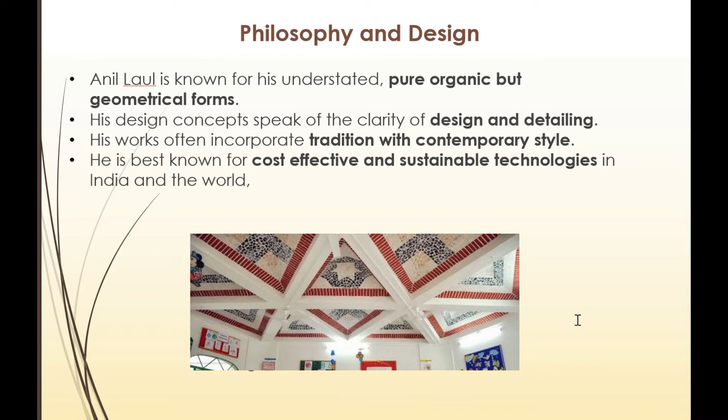Laul has been involved in various teaching, hands-on training programs. So he develops these techniques for low-cost construction, and then he used to take workshops to teach these techniques to other people. So in his words, I have chosen to do research and not research as we know it. To my mind, it is simple and requires a blend of nature's bounty, traditional wisdom, and advancement of the technologies developed by man. Nature, tradition, and technologies.

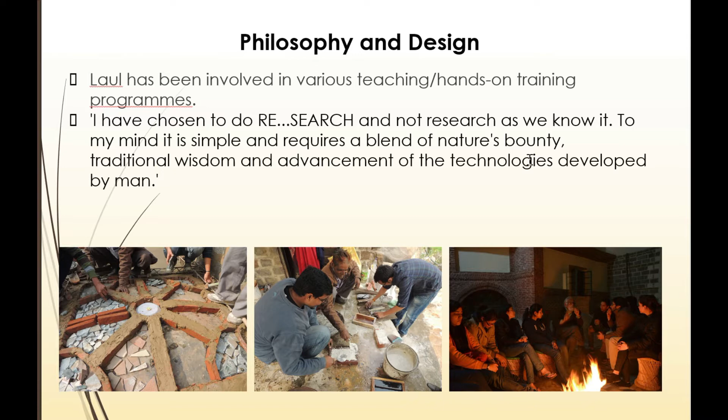Will I live in a home built with the technologies that I propagate for the underprivileged? Yes. In my case, I do. Book Green is Red by Anil Laul. So in this book, this statement by him is written because even though he developed low-cost techniques, the quality was very good. So even he was himself ready to live in such houses. The construction technologies used in high-income group housing are the same used in a slum rehabilitation scheme.

He built low-cost, low-energy, climatically suited and aesthetic houses. Even though it was low-cost, it was aesthetic as well, with recycled waste for people's real needs, keeping the humane scale alive. Not very grand, but humane scale. So this is a book by Anil Laul sir.

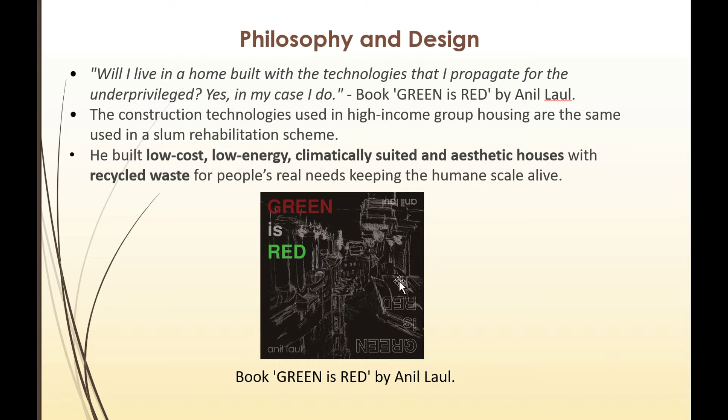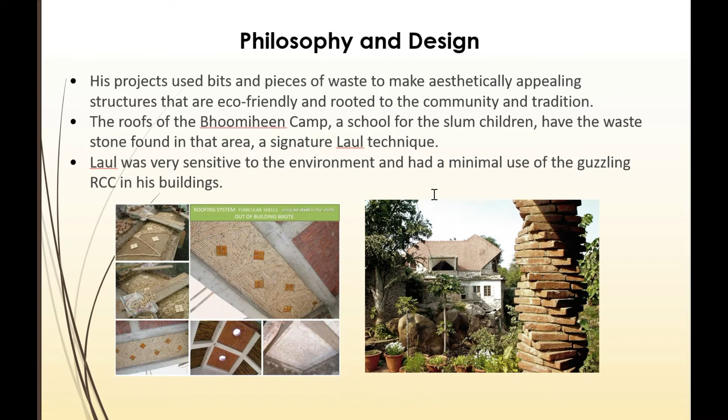His projects used bits and pieces of waste to make aesthetically appealing structures that are eco-friendly and rooted to the community and tradition. The roofs of Bhoomiheen camp, a school for slum children, have the waste stone found in that area, a signature Anil Laul technique. So whatever waste materials and whatever materials are found in that locality, he used those for that particular project. Laul was very sensitive to the environment and had a minimal use of guzzling RCC in his buildings. So these are other prominent works, other prominent projects done by Anil Laul sir.

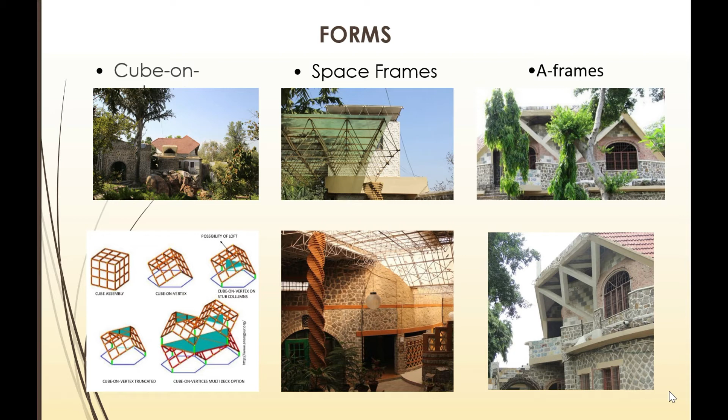So this is cube-on-vertex technique for roofing, space frames, A-frames. And for roofing, he has used funicular shell roof a lot. A flat arch rotated around the center results in a load-bearing brick roof without the use of steel. So he is making roof without using steel, without using RCC.

How? By making a flat arch in a curved fashion and laying bricks along with it. So it results in a load-bearing brick roof. The funicular structure is one such compression structure which causes conservation of natural resources by obviating the use of expensive steel and cement. Further, the arch distributes the point load in all directions equally. Thus, it is able to withstand impact loading at any point.

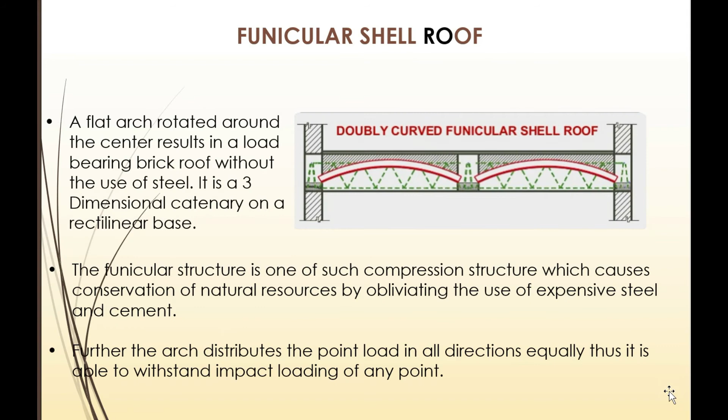So, apart from this, you can make this funicular shell roof flat as well. How? You have to lay bricks, but you cannot make it for a very long span. For medium and small sized roofs, you can use this kind of structure. So first of all, a mold is made, and in this mold bricks are laid in this fashion. So layer by layer you keep laying bricks this way.

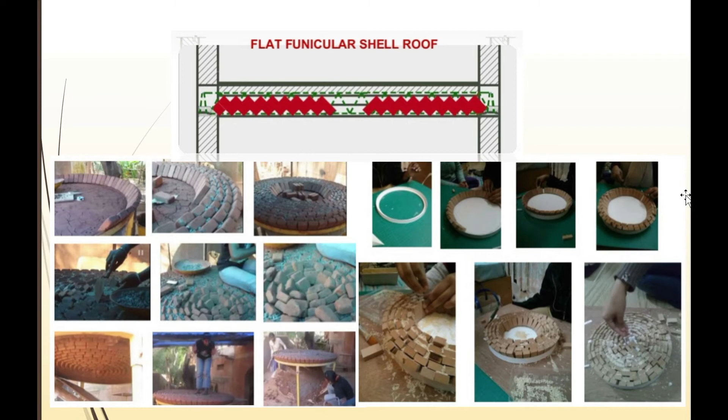Fill this with maybe some lime or aggregate. You fill this up and interlock it with a keystone for every layer. Keep interlocking with keystones, and then it becomes so strong that even if you stand on it, it does not fall. And finally you can remove the mold. So this is flat funicular shell roof. And through this you can create a variety of designs.

A simple yet splendid roofing system using natural materials. You are just using natural materials and you are creating these beautiful designs. It can take any shape: square, rectangle, trapezium, triangular, or any other shape. Various artistic patterns. You get to see so many artistic patterns.

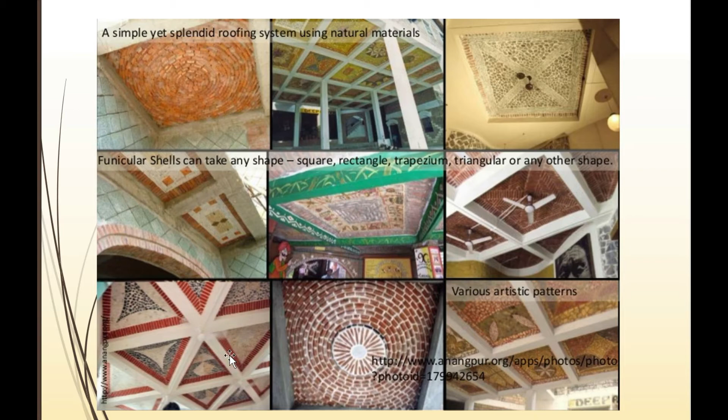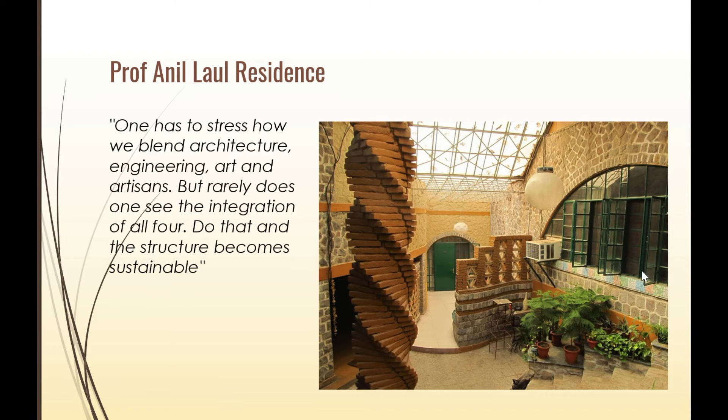Let us study a case study in detail, and over here we are taking a look at his own house. One has to stress how we blend architecture, engineering, art, and artisans, but rarely does one see the integration of all four. Do that, and the structure becomes sustainable. What are the four things? Architecture, engineering, art, and artisans. So, in architecture, you have to understand the engineering part as well and the artistic part as well.

Built on 6,000 square feet, it is an apt example of a low cost, eco friendly house which also helps protect, conserve, and recycle resources. According to Laul, this was quarried land when he bought it way back in 1987. I am living in an area where stones and coarse sand are available in plenty. I have used those materials to build my house. It is just that common, sensible approaches and practical structures are considered extraordinary, and my house has become the talk of the town, he says.

Instead of using regular bricks that are 3 to 4 inches in breadth for the walls, Laul has used stones that are 12 to 18 inches thick.

Says the architect, the thickness of the walls insulates the house in such a manner that it is cool in summer and warm during winter. We seldom need to use the air conditioner.

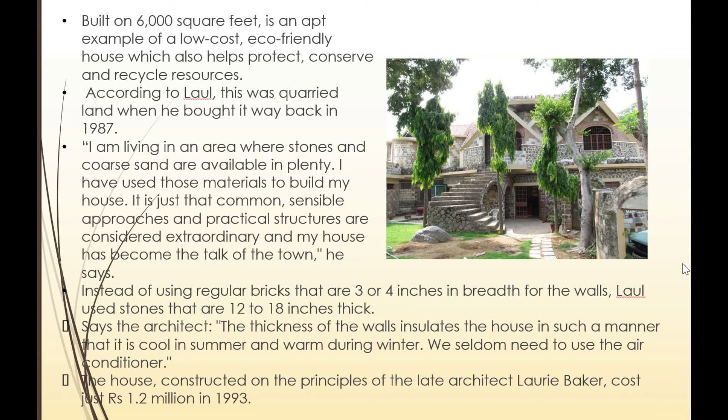The house, constructed on the principles of the late architect Laurie Baker, cost just 1.2 million in 1993. So 1.2 million is what? Around 12 lakhs. So in just 12 lakh rupees, he got this beautiful bungalow built.

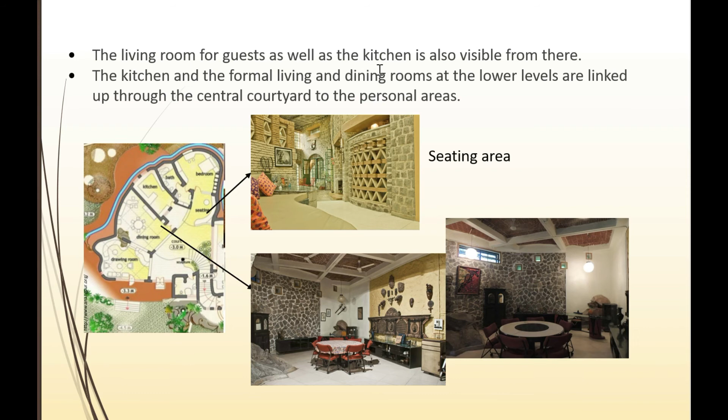And this overlooks this space as well, all of these things. So that is why this master bedroom has been located centrally, so they can have a view. The master can have a view of the activities of all of the premises. The living room for guests as well as the kitchen is also visible from there. You saw that?

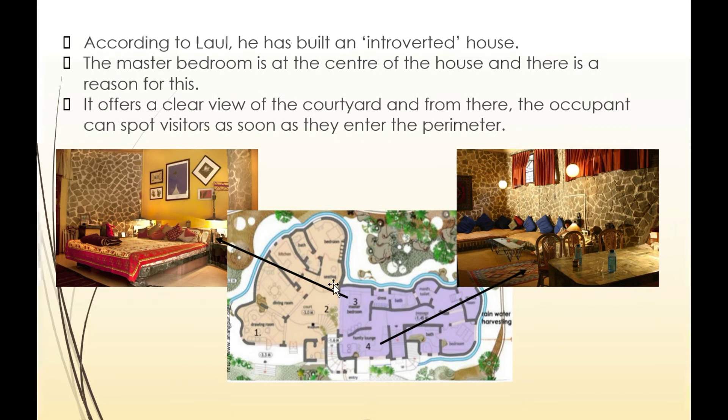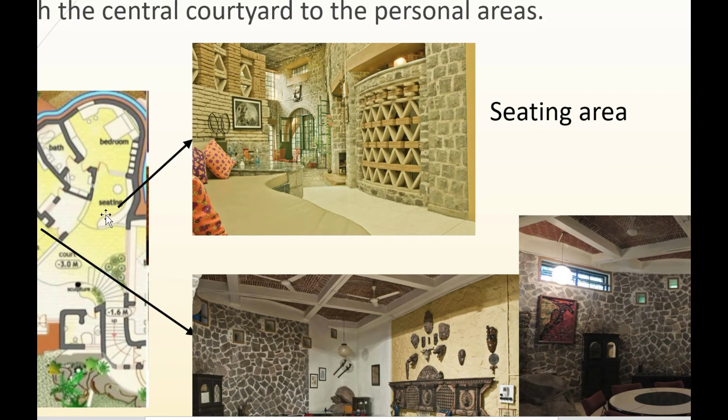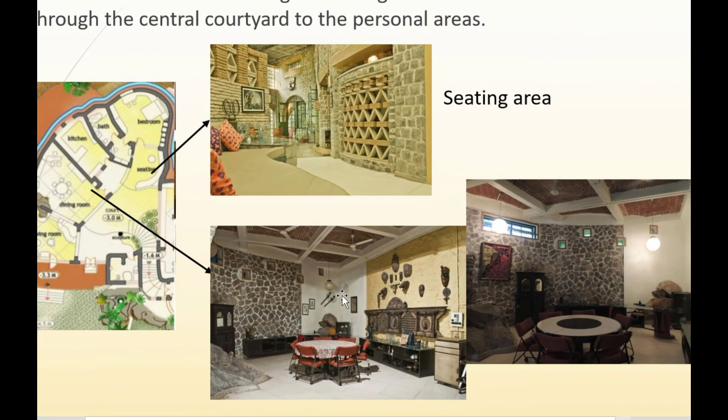Living room for guests and kitchen. Okay, here is the living room and here is the kitchen. This is the kitchen and this is the dining area. So you see, this is the seating area. Over here, this seating area. This is dining space. This dining space over here. Another image of the dining space. So this is the dining space.

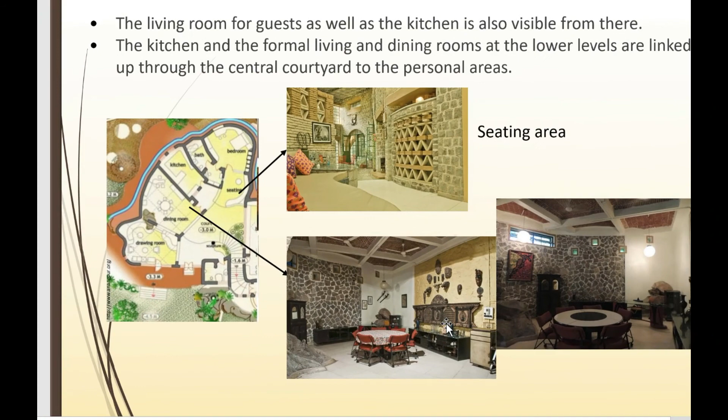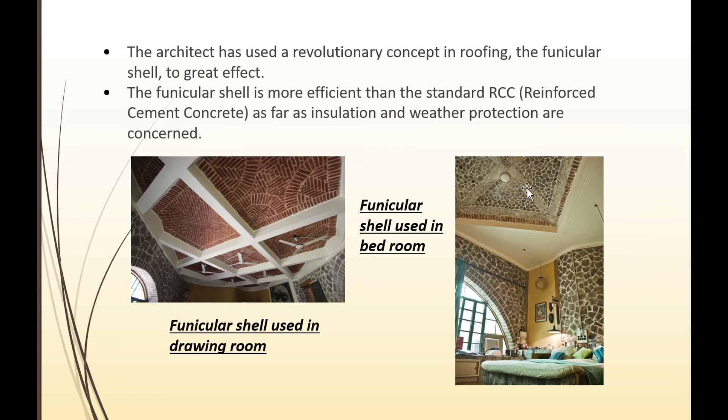The architect has used a revolutionary concept in roofing, the funicular shell, to great effect. So all the roofing he has done with funicular shell only. The funicular shell is more efficient than the standard RCC, reinforced cement concrete, as far as insulation and weather protection are concerned. So this is the funicular shell roof in the bedroom. This kind has been used in the bedroom, and this is used in the drawing area.

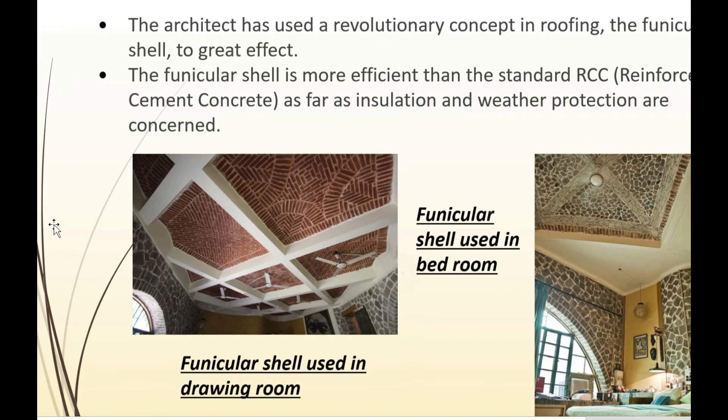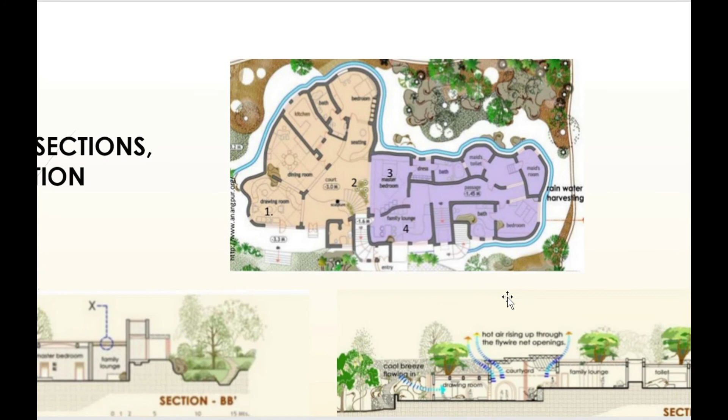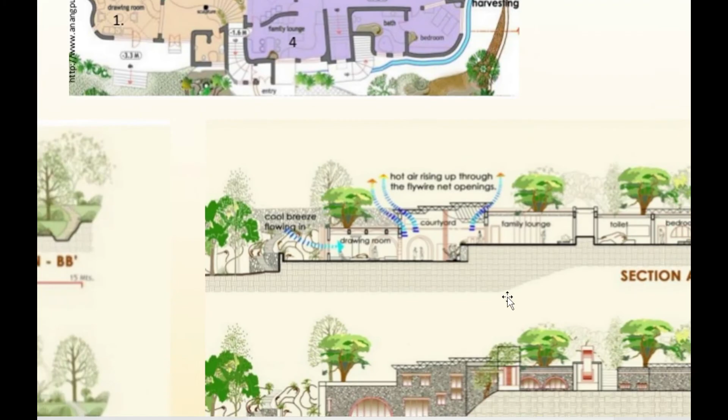Here is the plan. You see, water harvesting provision is also done along the building. So all of this water gets collected, and he has these gardens, landscaping. So this harvested water is used to water his garden. These are the sections. Hot air rising up through the fly wire net openings. Cool breeze flowing in. So a naturally ventilated house. Very low maintenance. Courtyard, air circulation.

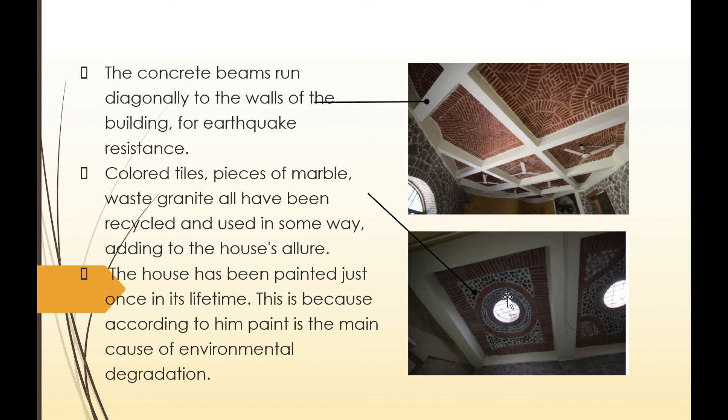The concrete beams run diagonally to the walls of the building for earthquake resistance. So, concrete has been used for beams, but for roofing, concrete has not been used. Instead, funicular shell is used. Colored tiles, pieces of marble, waste granite, all have been recycled and used in some way, adding to the house's allure. The house has been painted just once in its lifetime. This is because, according to him, paint is the main cause of environmental degradation.

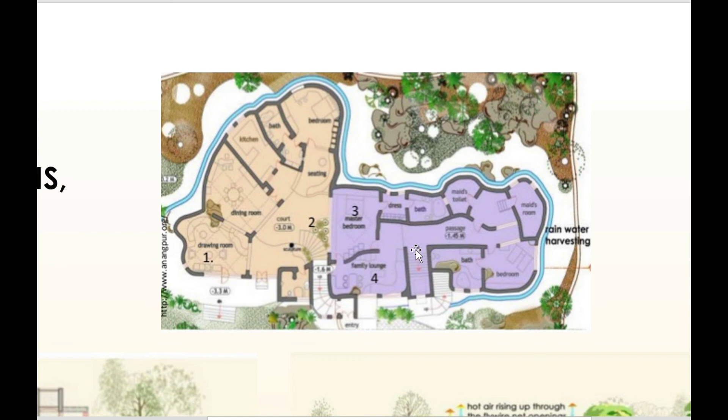Also, you see in the plan, hardly any wall you will find that is straight. Maybe this wall is a little bit straight, and over here. Other than that, all of these are curves. It is looking so organic, as if it has grown from the site.

During the monsoon, when there is a threat of floods, a drainage system has been built in such a way that no water collects around the structure. The drain empties into areas a little away from the house, but no water leaves the premises. The kitchen and bath wastewater empty near the banana and papaya trees in the garden. Another novel method of watering the plants, but in a cost-efficient way.

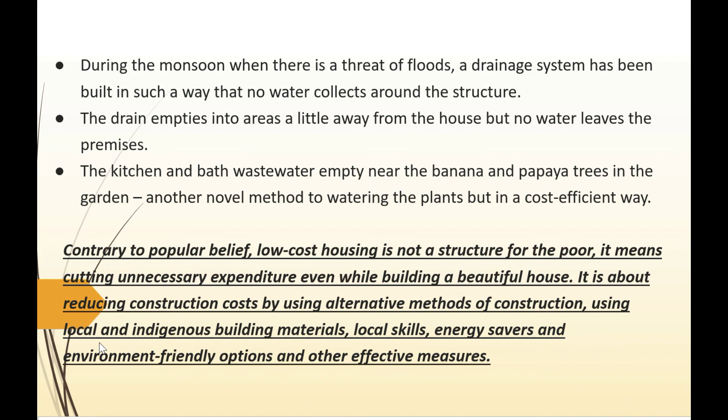Contrary to popular belief, low cost housing is not a structure for the poor. It means cutting unnecessary expenditure even while building a beautiful house. It is about reducing construction costs by using alternative methods of construction, using local and indigenous building materials, local skills, energy savers, and environment friendly options and other effective measures. So this was about Anil Laul sir.